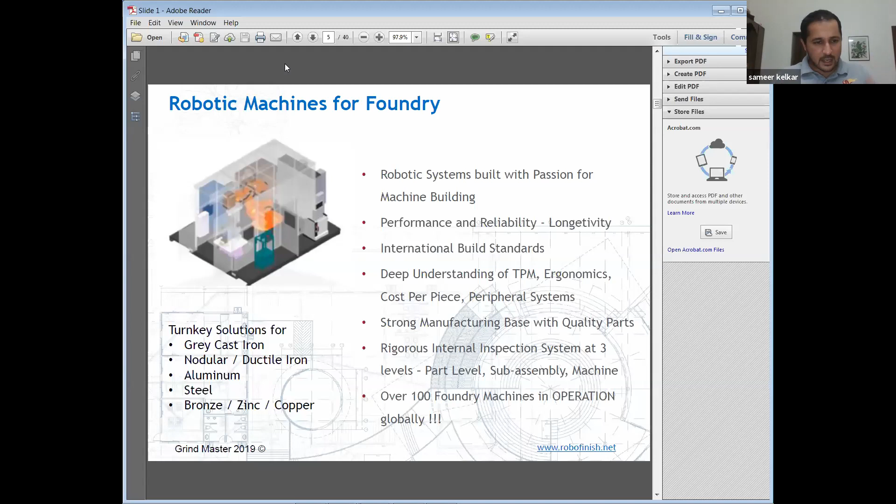The solutions for ferrous castings and non-ferrous castings are substantially different from each other. The non-ferrous casting solutions tend to be lower powered. The material in non-ferrous castings is much simpler to remove, whereas in ferrous castings it is harder to remove. So machines for ferrous castings are more high powered, with heavier duty robots inside them. Just to give a comparison, machines for non-ferrous castings typically have 1, 2, or at most 4 kilowatts of machining power, whereas solutions for ferrous castings begin from 15 kilowatts and go up to 45 kilowatts. So the power we pump into these operations is very different for ferrous and non-ferrous castings.

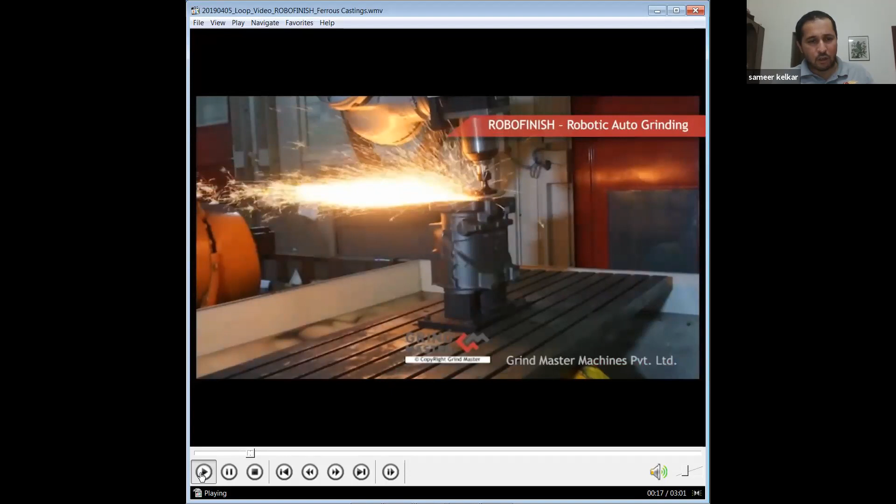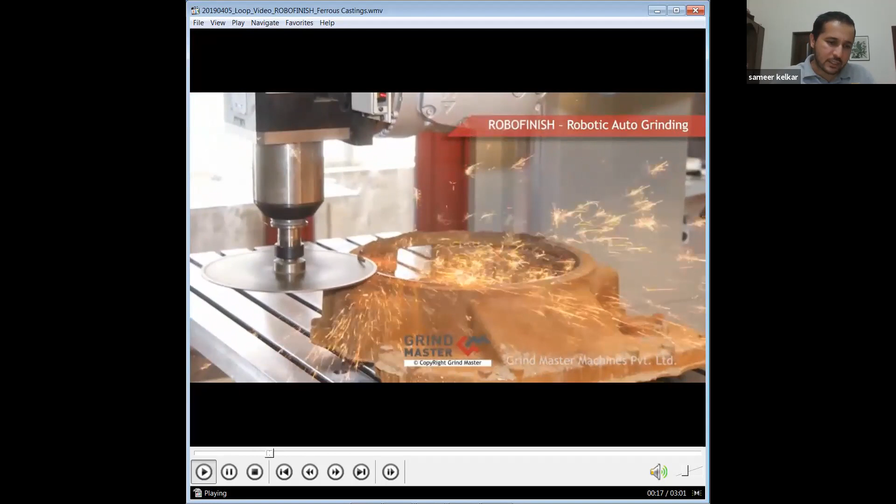I would like to share a video which gives a brief about how typical machines work for ferrous and non-ferrous castings. You would see here a range of ferrous castings being grinded with a robot using heavy duty machining spindles. You can see it doing the grinding of parting lines, bumpers, and sometimes also riser and gate cutting, removing very high flash which sometimes comes on these castings.

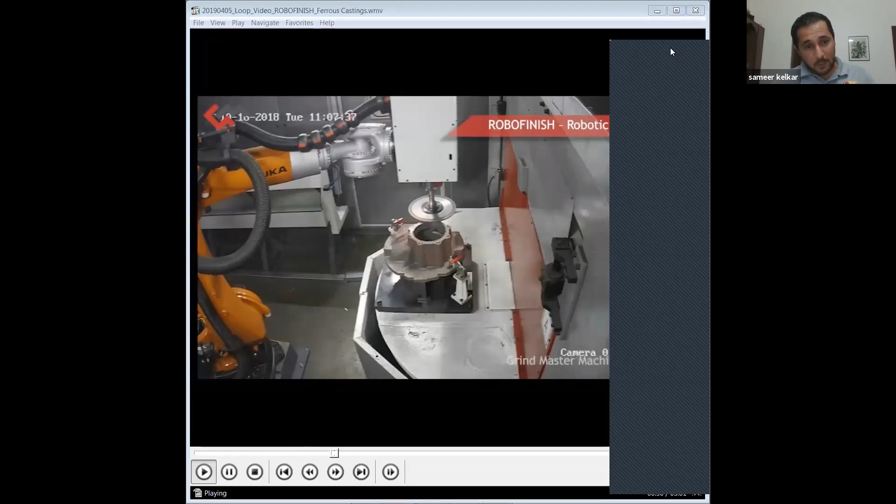Here you can see how we use an offline part programming tool to generate the part program for a new casting. This gives us the benefit of deploying new part programs very quickly. The key feature you can also see in this video is that because we use very high powered tools, the cutting operation is really fast.

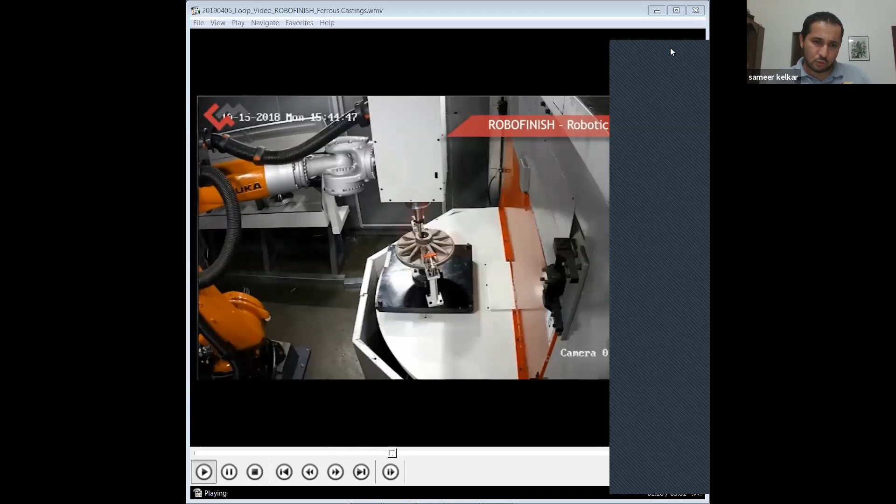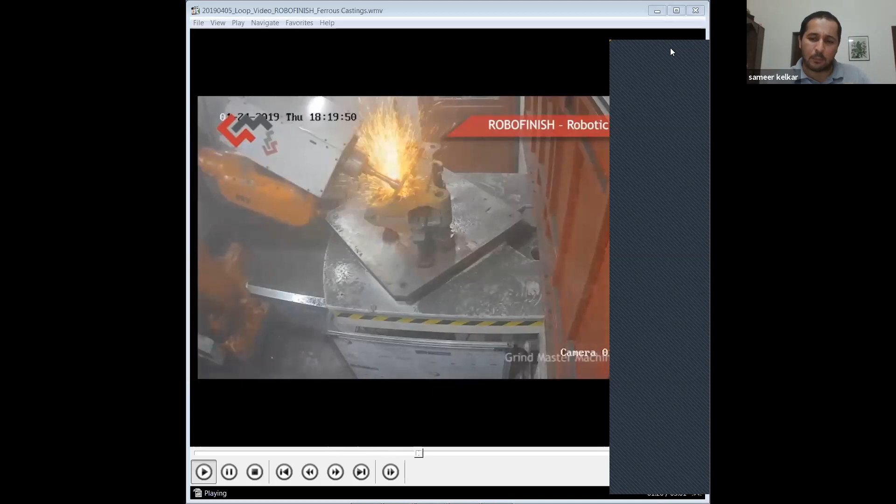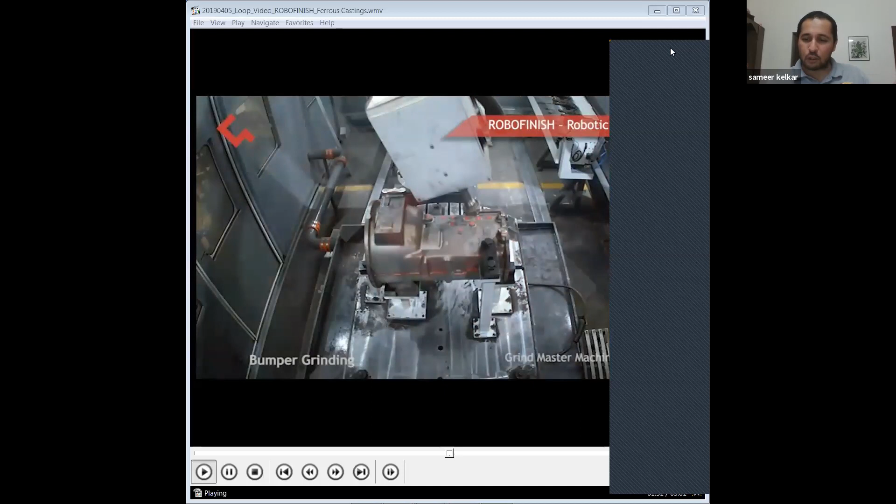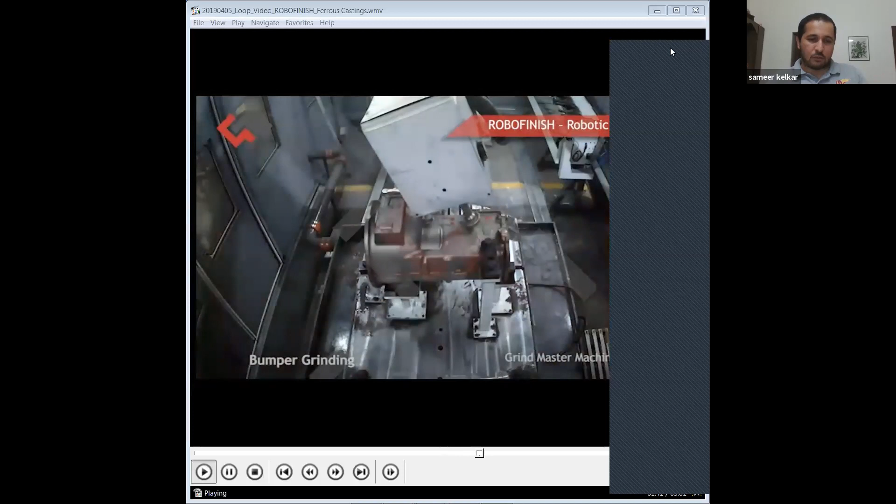Robotic finishing machines for ferrous castings are typically 5 to 10 times faster than a human operator. The main reason is that a human operator holds a 1 or 2 horsepower spindle which he can manually hold. But in this case, the robot can hold 15, 30, or 45 kilowatts. So the machining power the robot brings to this fettling task is multiple times more than what a manual operator can bring, and that is why the robotic machine can be a lot faster and make this operation more economical.

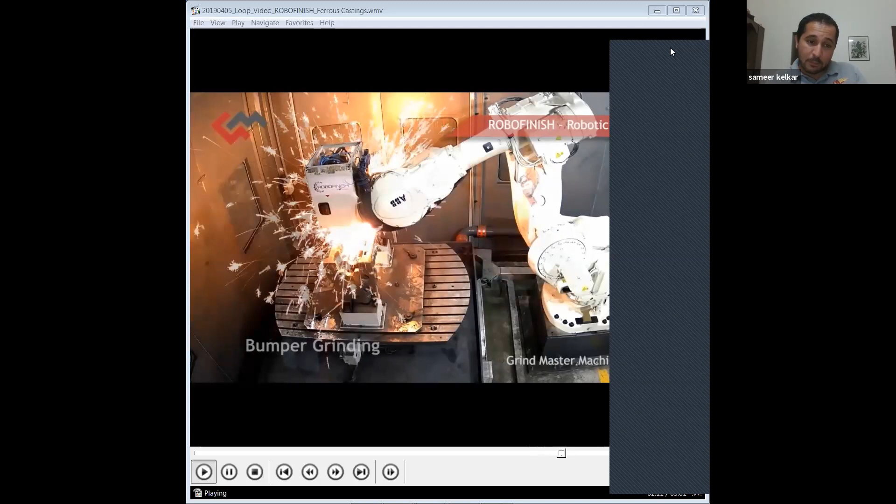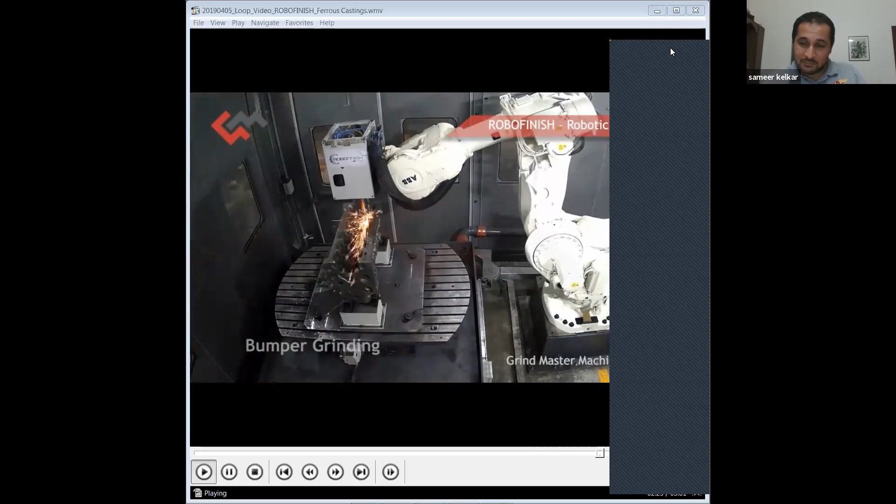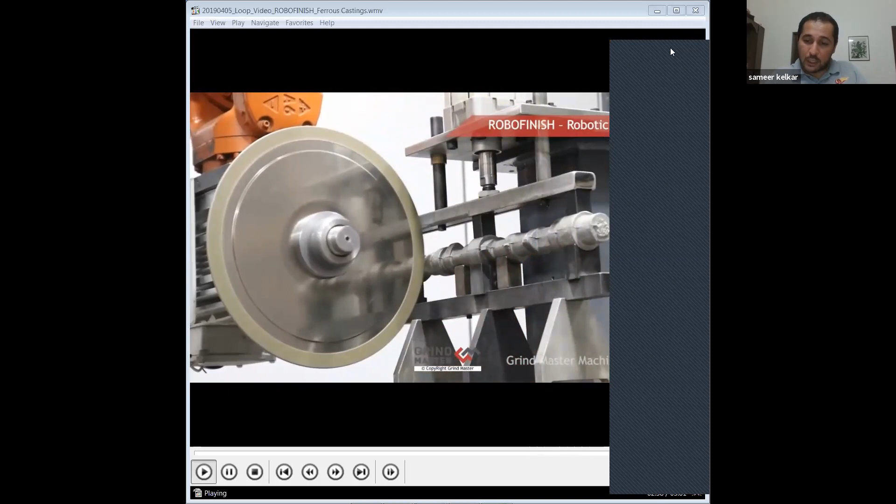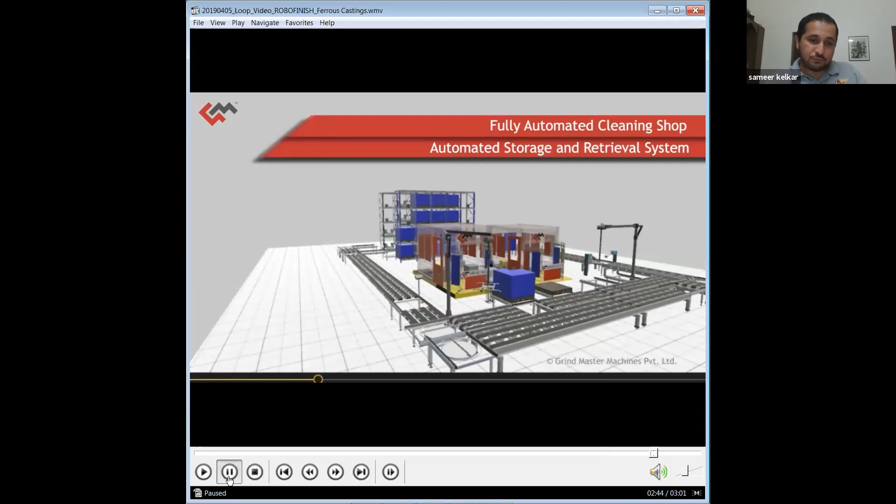Replacing manual operation by giving the same tools to a robot won't serve the function, because using the same tools the robot will be roughly the same speed as manual operation, and the economics won't work. The economics of this function works well because the robot can do the task a lot faster than a man. By using this technology, a fettling shop of a foundry, which is often quite messy due to the number of people, tools, and dust, can be made into a fully automated mechanized cleaning shop with conveyors to move the castings and multiple machines on which the castings are finished.

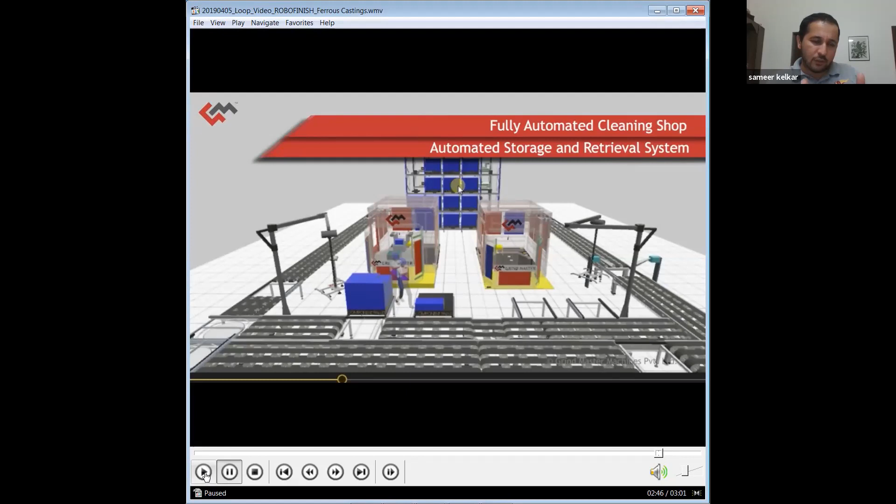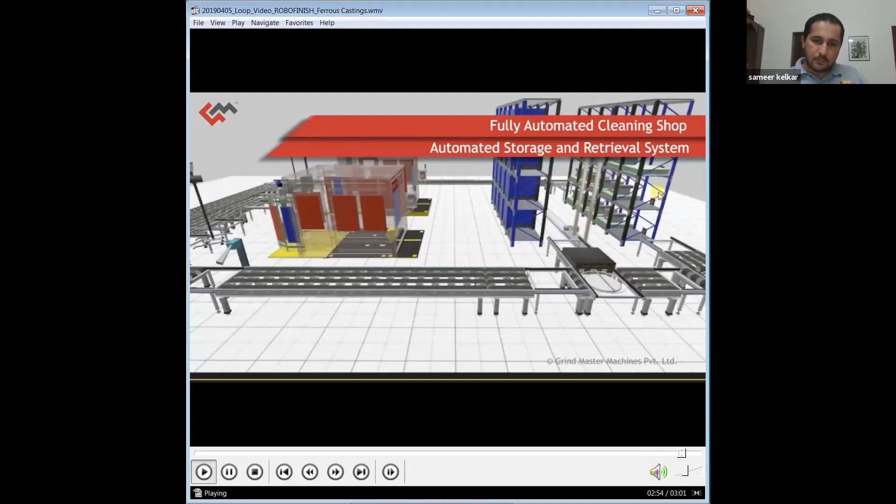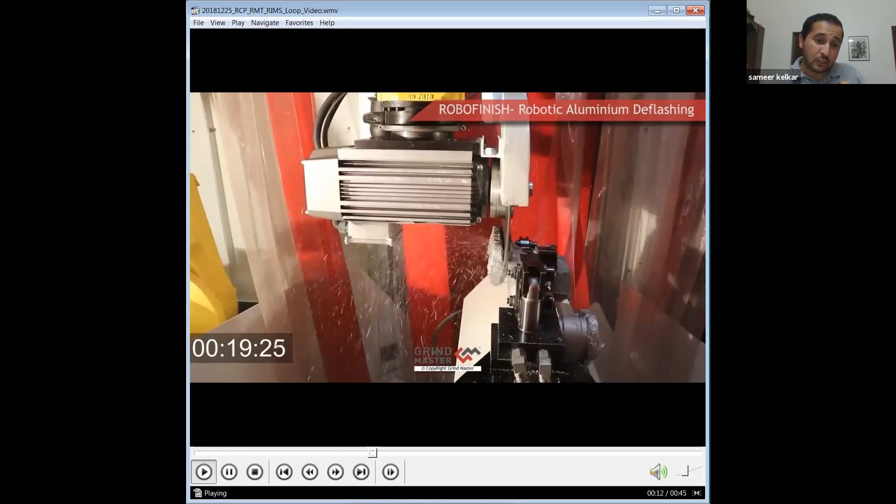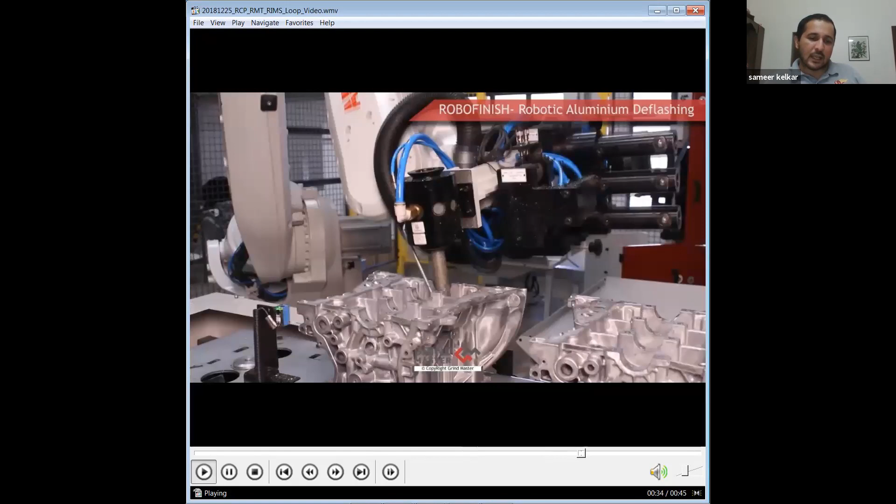Just to give a contrast of the difference between ferrous and non-ferrous castings, I am now going to play a video of non-ferrous castings. This video is played mainly to give you a glimpse that the solutions for non-ferrous castings are very different and comparatively a lot simpler than the solutions for ferrous castings, because non-ferrous castings are typically made in metal dies and molds. So the amount of flash and burr is also very less, and the machinability of the burr is a lot simpler than in ferrous castings, where the burr is really hard and difficult to remove.

With this, I'll go back to my PPT. After a short time, I'll come back to show more videos about how this operation happens. We basically have good experience with both non-ferrous and ferrous castings, and an understanding of what technologies can be used for what type of casting.

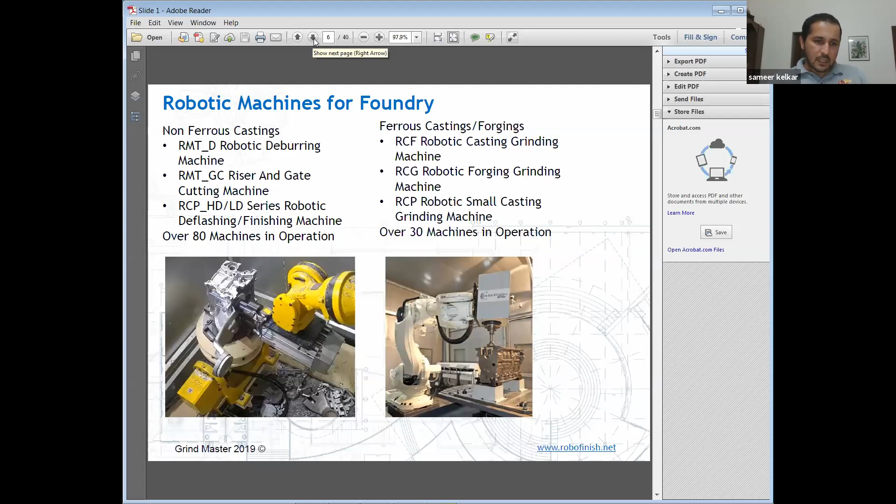Samir sir, can you enlarge your window a little bit? Yes, I have gone now to full screen mode. I hope you can see it in a bigger way now. Yes, thank you sir, thank you.

We will now come to ferrous castings. The rest of this webinar will be mainly based on ferrous castings. What do we mean by the fettling operations? We mean riser and gate cutting, parting line grinding, bumper grinding, and gate leftovers that have to be grinded. We also mean sometimes the deburring of sharp corners and hole break-in.

Talking about the sequence in which castings are placed for the fettling operation: castings are given for fettling mainly once the core sand in the casting has been removed. We need the casting to be without any sand on it, because sand can damage the tools used for fettling. So once the sand is removed, the castings can be loaded into the fettling machine.

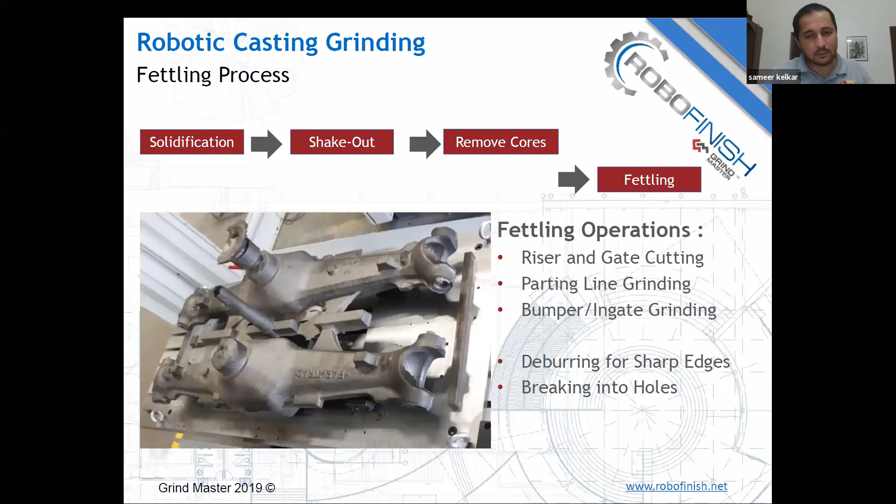Why do robotic ferrous casting finishing or grinding? The main reason is that it can give a productivity jump of between 5 to 10x - 5x for small castings and 10x for heavier castings. We can also finish very complicated shapes of castings with high consistency and accuracy, and achieve better health and safety standards in the fettling shop, with less hazards for machine operators handling the machine.

How do we do this? As we have said, we do this with heavy duty robots with high powered spindles, correct tool selection which includes the grinding wheels, and a key adaptive software, which I will talk about a little bit more in the next slide.

What are the limitations of this technology? This technology is economical for medium or large size castings, but which are made in high volumes. Typically, if one machine can get occupied by 10 to 15 varieties of castings, then it can be really economical to run such a machine.

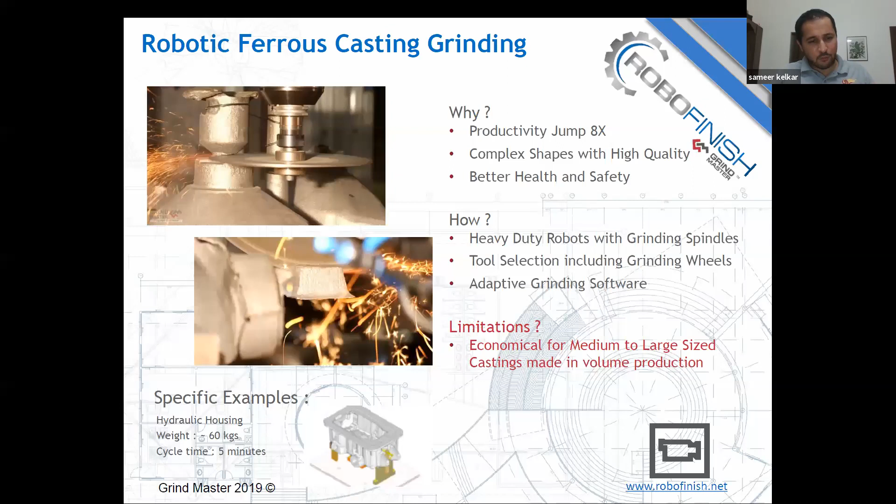Deploying this technology has a technology component and a management component. On the technology side, we have tools and fixtures, we have the softwares, we have merging of the robotics and machining technologies. But on the management side, we have certain aspects which need to be kept in mind by both the foundry and the solution partner.

One of the key parts here is that since this kind of technology is going to bring about a transformation, a change in the manufacturing methodologies of the foundry, it's important to approach this with a long-term vision and a plan for a few years. The beginning can be with a small step, but the plan should be there for a few years.

Within these few years, there also needs to be knowledge building. The foundry would have to build maintenance capabilities, team members who are experts in robotics, and team members who are good in machining technologies.

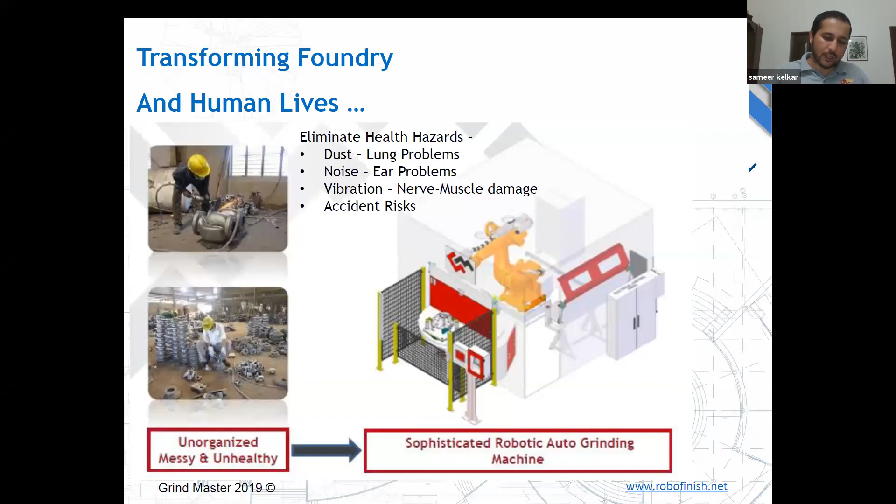This will typically solve quality problems in manual grinding, such as scratch marks and digging marks. These digging marks and scratch marks are becoming more important on the thin walled castings coming out nowadays, because a digging mark or scratch mark can majorly change the strength, especially the fatigue strength of a casting, and putting in a scratch mark or digging mark can lead to premature casting failure when it is in operation.

Similarly, incomplete fettling, uneven finishing, is again a major complaint on castings. These quality problems get even more prominently displayed when you are going for export of castings, because buyers in Europe and USA are used to seeing the looks of a casting in a very minute manner, and can really find out issues like this which are not acceptable to them.

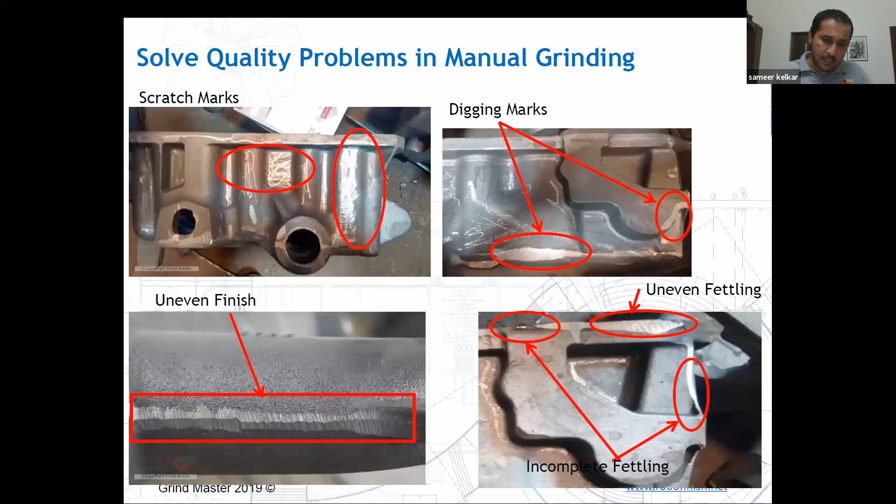Now I'll briefly talk about the different methodologies that we use for finishing of the castings. We begin with the riser and gate cutting operation.

70 or 80% of the time the gate and risers are cut in a tumbling process or with heat plasma, but in around 15 or 20% of the machines that we have built, we have done the riser and gate cutting as well.

Following the riser and gate cutting, we go for the next heaviest operation, which is bumper grinding or gate leftover grinding. Typically when gates and risers are cut, 4 to 5 millimeters of stock is left.

So removing this 4 to 5 millimeters of bumper or gate leftover is what we do with the robot. Following this, we do parting line grinding, which removes the parting line that comes on the periphery of the casting, and finally the face grinding. Face grinding is typically done for some faces where the flash comes out on the face.

Then certain castings require a hole break-in operation, in which there is a thin flash that comes in a hole in the casting, and we use a machining tool to do this hole break-in operation.

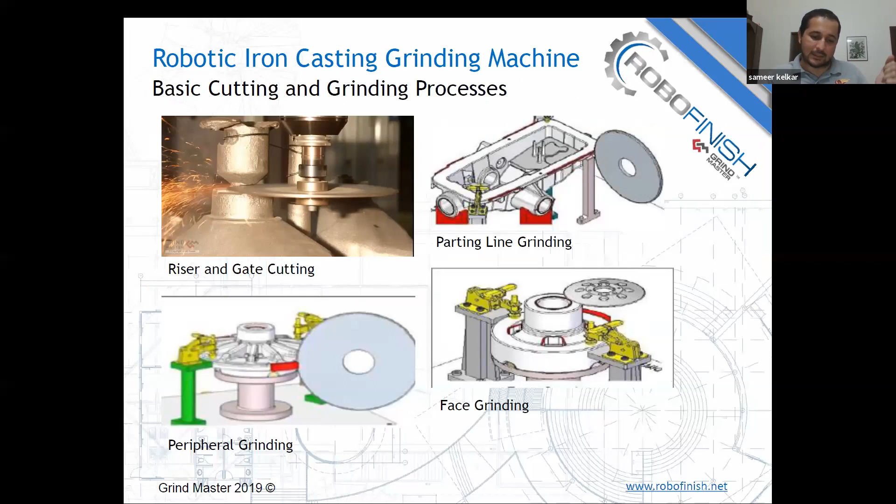Now, what I spoke up till now was more about machining and what tools to use. Let me talk of the biggest challenges in finishing of the castings. The key challenge, and this is a differentiator between a machine tool and a robotic finishing machine, is how to handle the casting to casting variations.

Ferrous castings which are made in a sand mold have fairly large variations. If you take a small casting, say 400 millimeters or 500 millimeters in size, it will typically have a size tolerance of around 1 to 2 millimeters.

Similarly, when you take a casting which is 1 meter or 1.2 meters in size, the tolerance on the size of the casting can be 6 to 8 millimeters. When you go for a bigger casting, say 2 meters to 2.5 meters, this variation can be 10 to 12 millimeters. So dealing with this casting tolerance is a key challenge.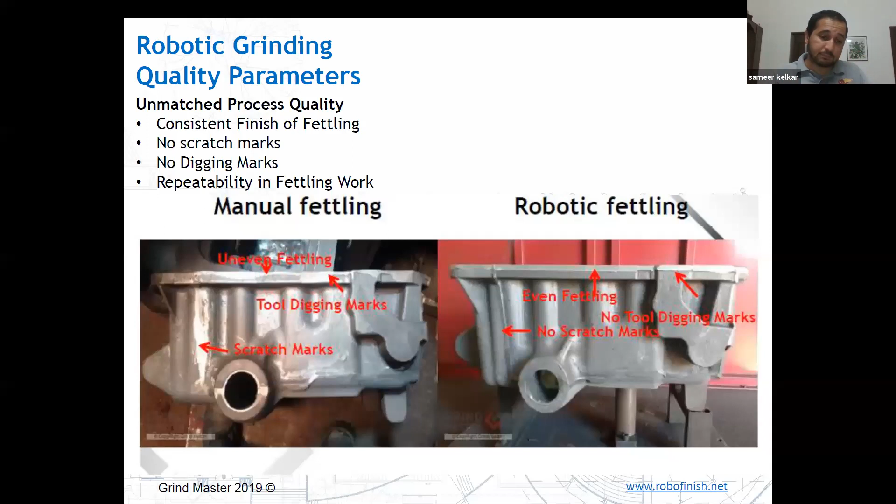So generating these parting lines as per the CAD model of the casting. Typically, the tolerances that we use for the grinding parameters here are 1 mm for small or medium size castings and 1.5 mm for the large castings.

This is a tolerance which we have learned by working with the global foundry industry, including some leading foundries in the US, where the casting tolerances are specified on the drawing in these terms. So we follow those global methodologies to check if the casting has been duly fettled or grinded or not.

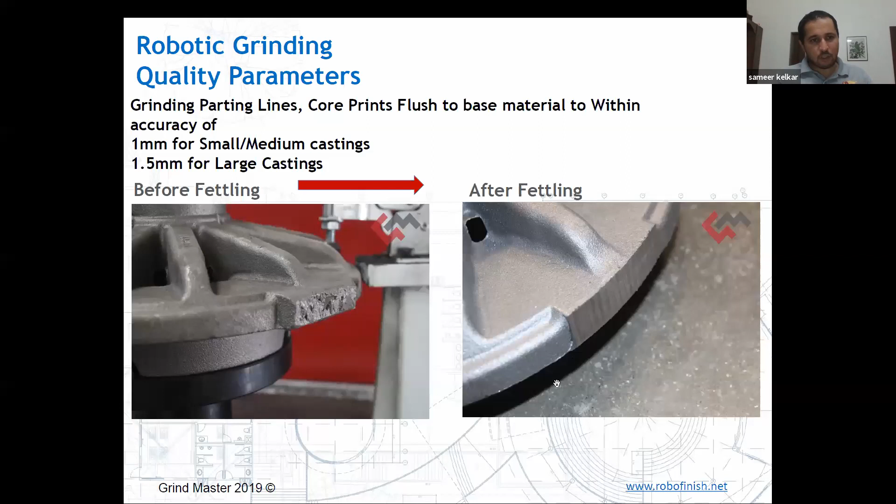You can see in this photo that after the fettling operation, the bumper has been grinded to within 1 millimeter of the base material. That's the kind of tolerance that we hold on the finishing operation on these castings.

Now let me talk a little bit about how these technologies are combined in machines. Our machine range is very wide because the castings we deal with are very varied and different. For small size castings, from 1 kg to 100 kg, we have machine models in which the robot holds the casting and the machining spindles are in a toolbox. For large castings, from 30 kilos up to 4 to 5 tons, we have the robot holding the machining spindle and the casting kept on a fixture. We will first see this model in which the robot holds the spindle and the casting is kept on a fixture.

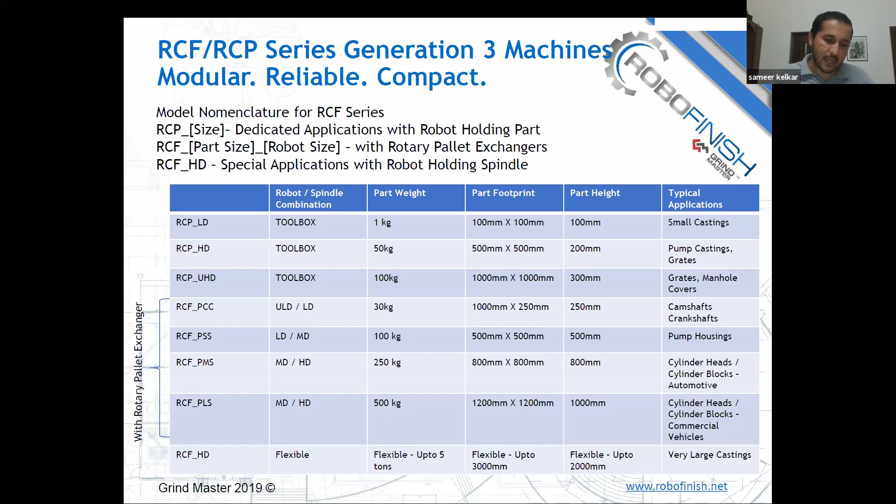Typically, these machines come with a pallet exchanger system in which an operator can place the part on a pallet. The pallet goes within the machine where the robot holding the spindle completes the grinding operation. Meanwhile, the operator can do the load/unload on the pallet that has come outside the machine. Each pallet exchanger has 2 fixtures - one within the machine and one outside the machine, always.

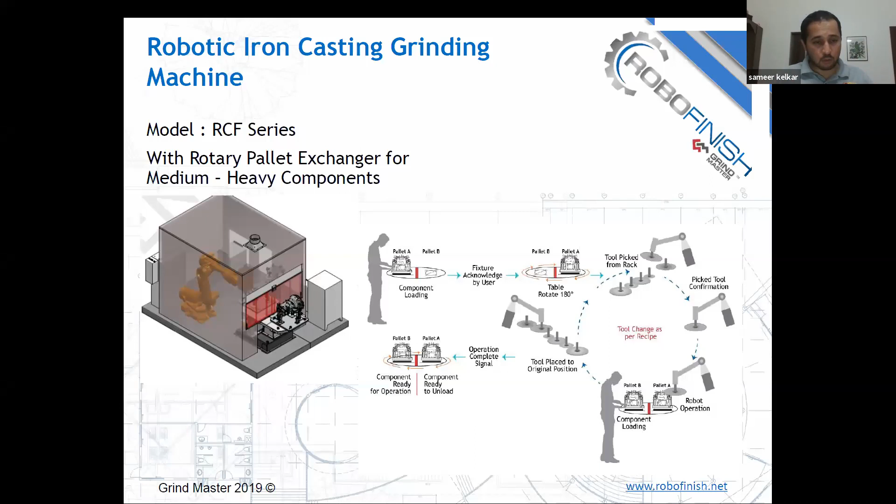Within the machine, the robot has a reliable heavy duty spindle system with a tool changer to automatically change the grinding wheels, and is fully closed with a double-walled enclosure for dust protection and noise protection. The castings are kept on a machining table with a 7th axis to orient the casting in front of the robot. We'll quickly see a video of this type of machine to get a better understanding. So just give me a second, I'll play this video.

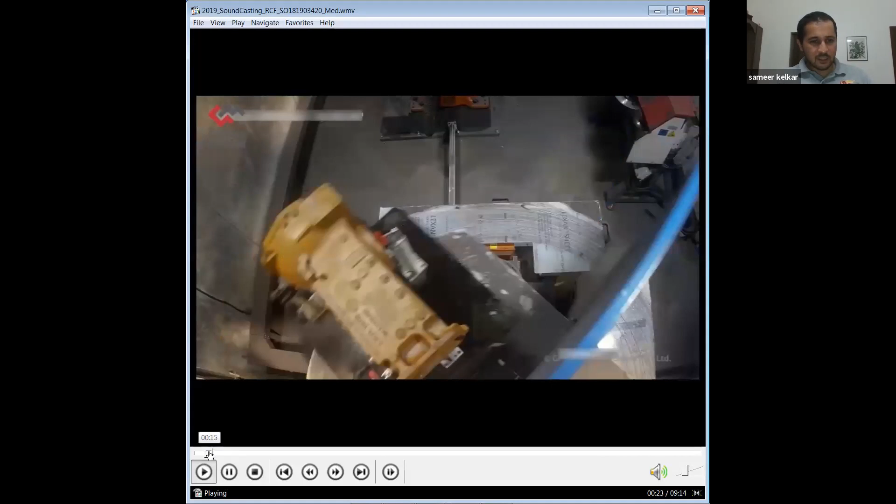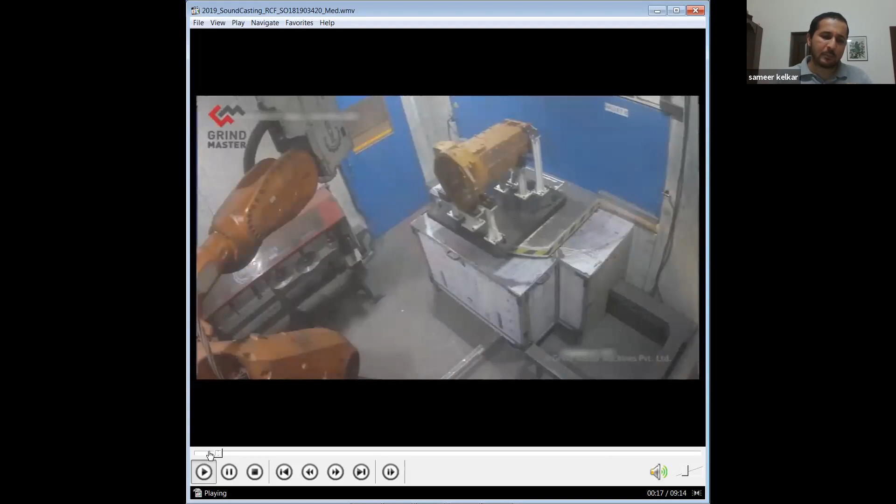Here you see a video of a machine doing a mid-size casting. The raw casting has been brought into the machine. The machining table orients the casting in front of the robot. The robot begins by sensing the casting from multiple directions. Once the sensing cycle is complete, it takes up a grinding wheel and begins the finishing or grinding process. Multiple wheels are used - in this case 2 to 4 wheels to complete the grinding operation on this size of casting. This casting is typically 150 to 180 kilos, and we take around 6 to 7 minutes to grind it completely.

You can see the robot completes operations with one grinding wheel, then picks up the next grinding wheel and does operations with that wheel. The stock removal here is quite heavy. This casting was manually fettled in around 40 to 45 minutes, compared to the 6 minutes the robot now takes. So the productivity of the robot, as I've said earlier, is between 5 to 10 times that of a manual operator.

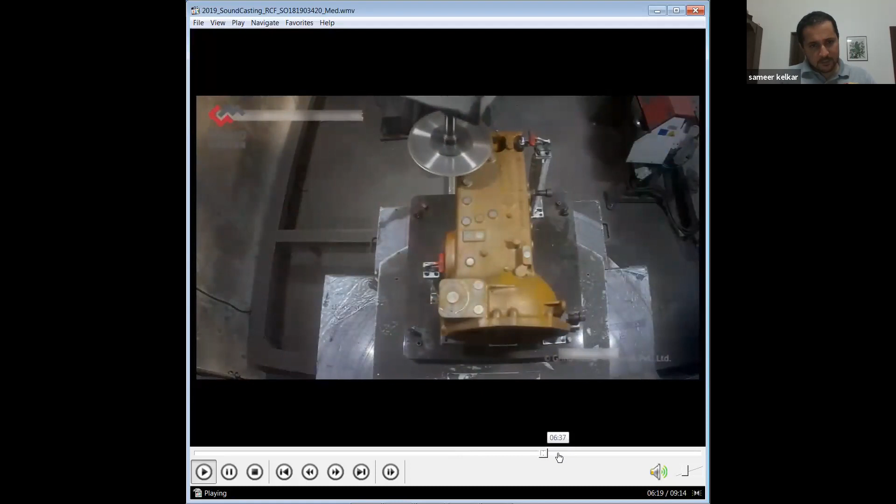Here the robot has picked up a cutting tool, a sawing tool, and is doing vent grinding for the vents on top of the casting. Finally, it picks up a small grinding wheel to reach sharper corners and areas where the bigger wheels couldn't reach, completing the 100% job. So the sharper corners, areas, pockets - sometimes there's a grinding operation within a pocket - are done by a smaller sized wheel.

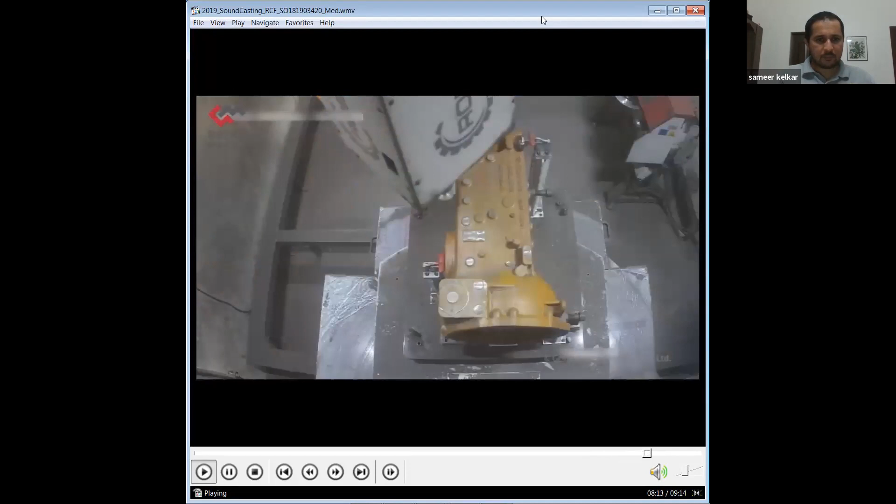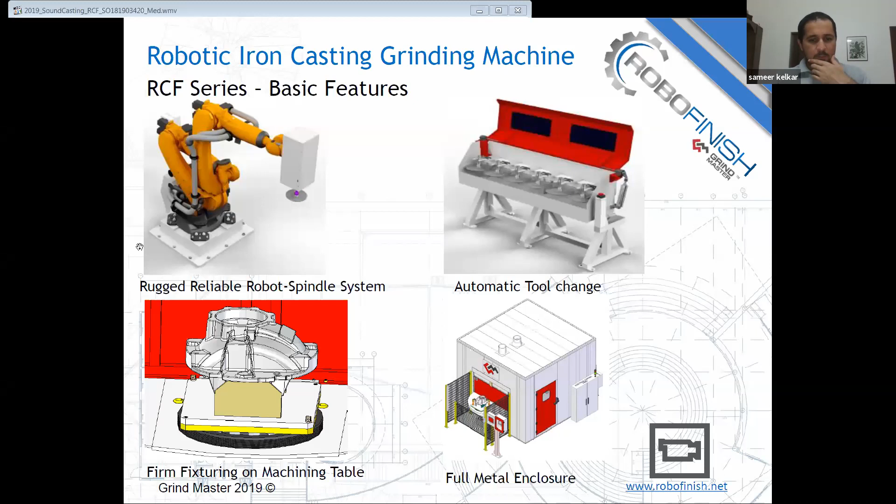So with this, I will go back to my slideshow. That would have given a brief understanding of the finishing operations. Now you could see in that video that multiple tools or wheels were used.

One key feature of our machine is the tool management system, which helps keep track of different wheels being used in the machine. This is very important because each grinding wheel has a certain life, and it's used for different volumes of stock removal in different castings. For example, a 300 millimeter diameter wheel typically has a life of around 8 to 10 kilometers. When grinding a 4-cylinder camshaft with a parting line of around 1 meter, this 10 kilometers of life translates to around 10,000 castings. Whereas a 6-cylinder camshaft has 1.5 to 2 meters of parting line grinding, so the same wheel gives a life of around 5,000 to 6,000 castings.

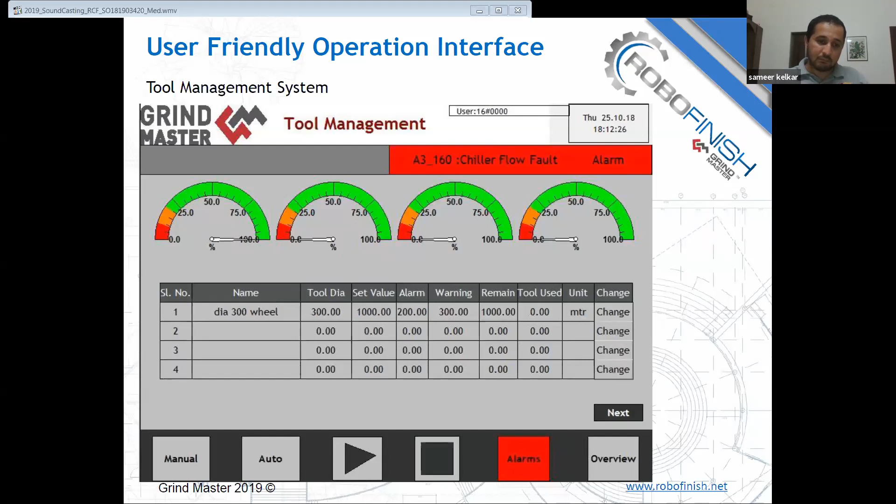We will now take some case studies, beginning with small castings that are done in this model.

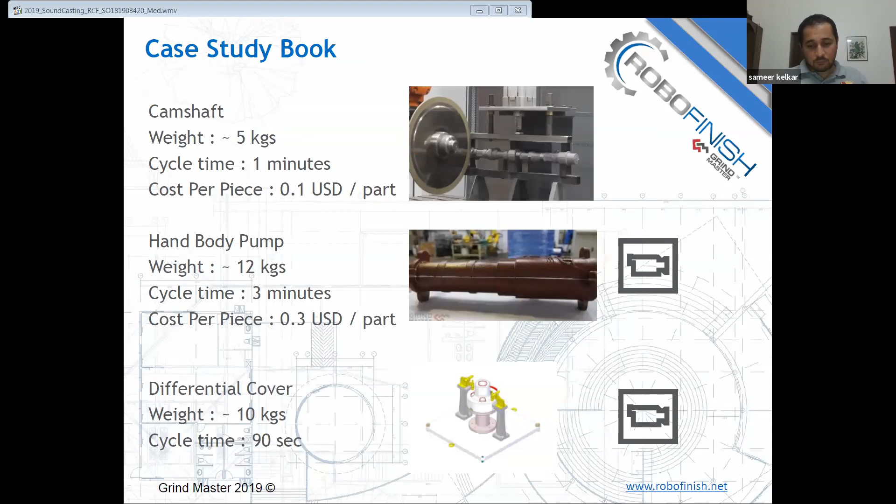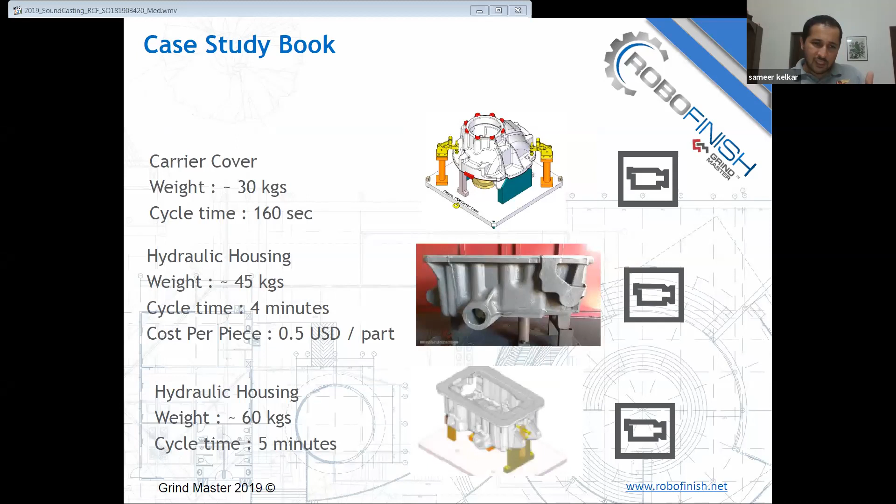Typically a small casting, say 5 kilos or 10 kilos, cycle times are in the range of 1 to 2 minutes. When we go to heavier castings like 30 or 45 kilos, cycle times are between 3 to 5 minutes. This can include carrier covers, hydraulic housings, and so on. For heavier castings like cylinder blocks or cylinder heads, 150 to 200 kilos, we typically get cycle times between 4 to 6 minutes. For castings heavier than this, weighing up to 2 to 3 tons, cycle times can be around 15 to 20 minutes. So the larger the casting, the more heavier the fettling operation, the more the cycle time.

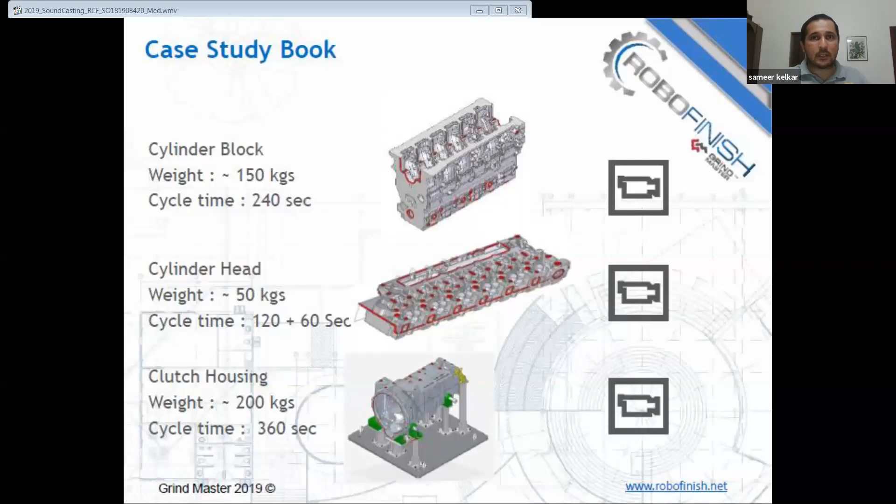Now we saw the machine where the robot was holding the spindle and doing the finishing of castings. The second concept is one in which the robot holds the castings, and we have a toolbox with multiple tools on which the castings are ground. This methodology is very good for small castings. We will quickly see a video of a machine with this kind of operation.

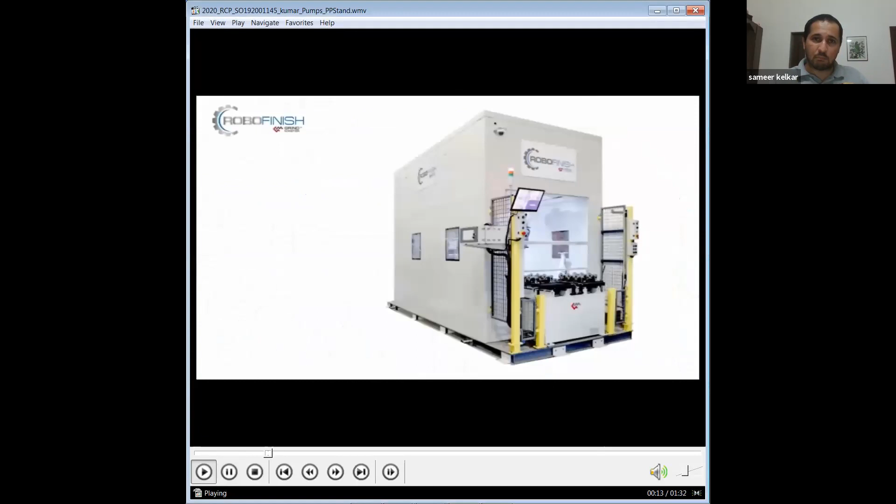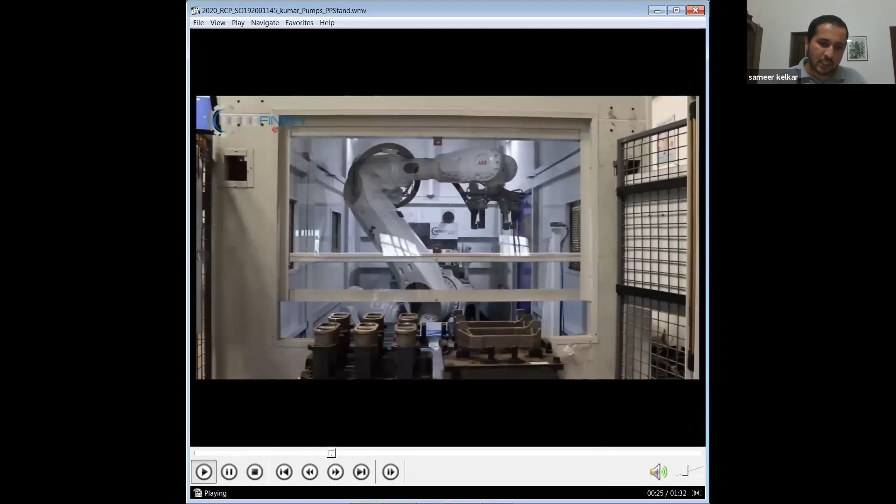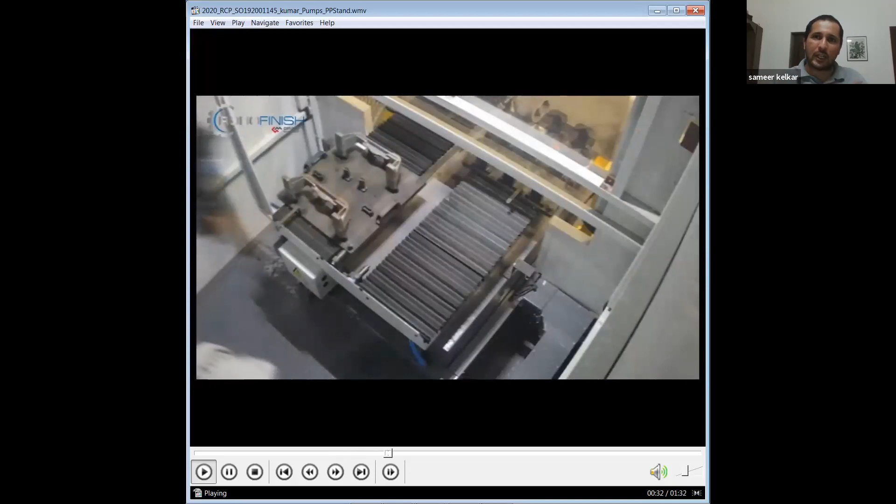So this is a video of a machine where the robot holds the casting and the machining spindles are in a toolbox. We introduced this model a year ago mainly to cater to manufacturers of small castings, because the machine where the robot holds the spindle is not really suitable for small size castings - it's more suitable for castings in the 50 kg to 500 kg range. So this model was introduced for smaller castings weighing 5, 10, or 15 kilos.

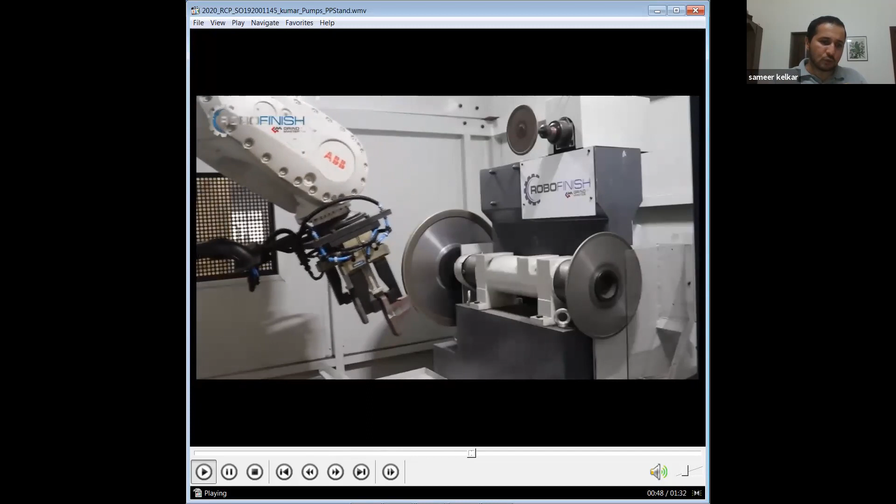You would see here that the robot holds a casting called the PP stand, and completes the grinding and finishing operation using a combination of these 3 grinding wheels. Typically the cycle time on this kind of casting, which weighs 1.5 to 2 kilos, is around 1 minute. The multiple wheels help in doing the various operations with the right tools.

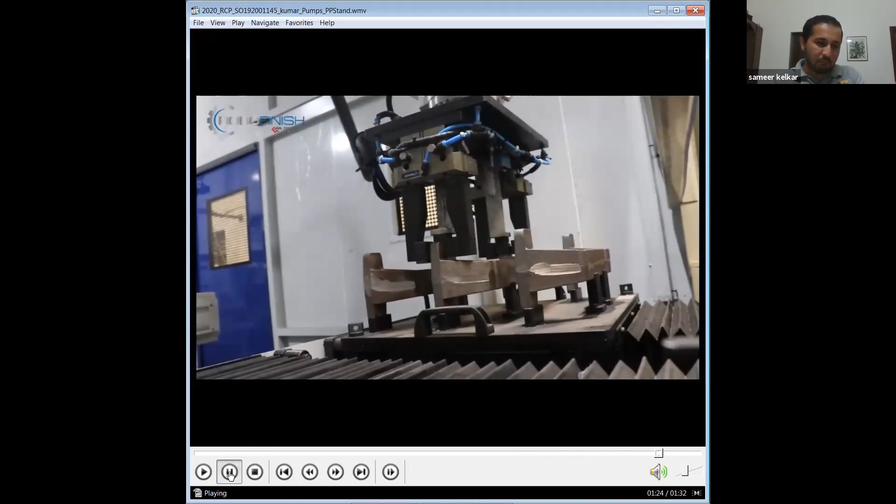In this machine, multiple castings are loaded on a pallet exchanger system. As you can see, 3 castings are loaded on the right side and 3 on the left side. So the machine picks up these 3 castings, does its grinding, and keeps them back. For the duration of a pallet life, the operator does not have to be close to the machine. So the operator in this case can typically manage 2 or 3 machines doing the fettling operation. One pallet comes in and the second pallet goes out to start this operation on a different type of casting.

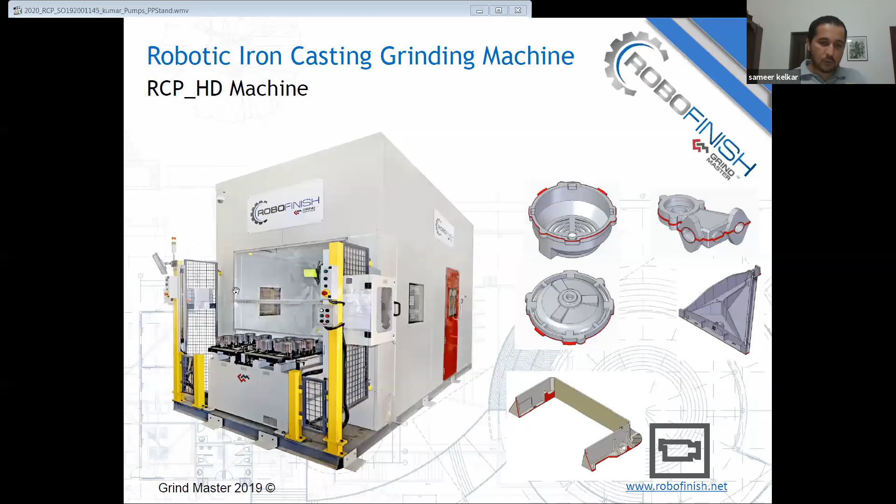I'll go back to my slideshow now, in which we show a variety of castings in the range of 1 to 2 kilos, where we take about a minute to finish the casting. For larger castings like manhole covers or sewage covers, we take 2 to 4 minutes, and these castings can be large, 30 to 100 kilos.

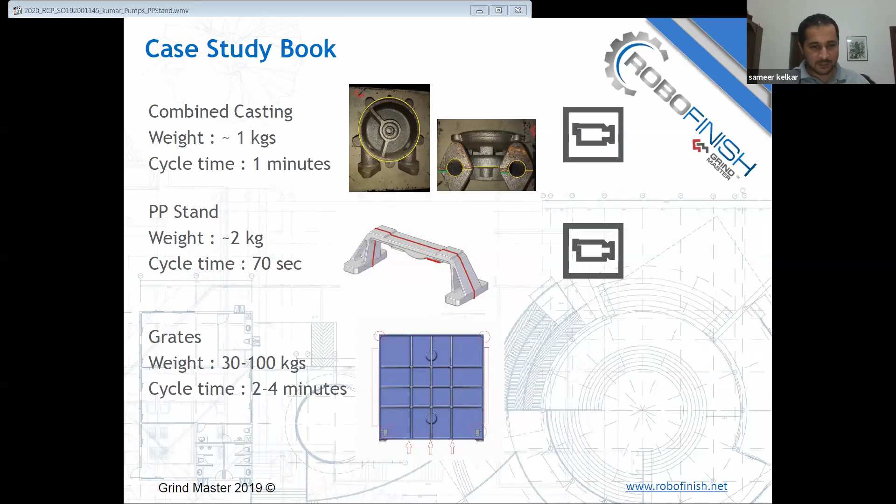Developing this application for a wide range of castings, we begin with an initial cycle time estimate and how to grind the casting. We then go into the tooling design and fixture design. We then do application engineering with offline part programming and simulation. This step is very important because it makes sure we are fully well prepared when deploying this part program on a real machine setup.

One of the key parts here is to determine the right kind of tools, and the stock removal rate and cycle time are dependent on how heavy the flash is. Though we work with the CAD models of the casting, the heaviness of the flash is not demonstrated on the CAD models, so we typically like to see real castings to determine its flash level.

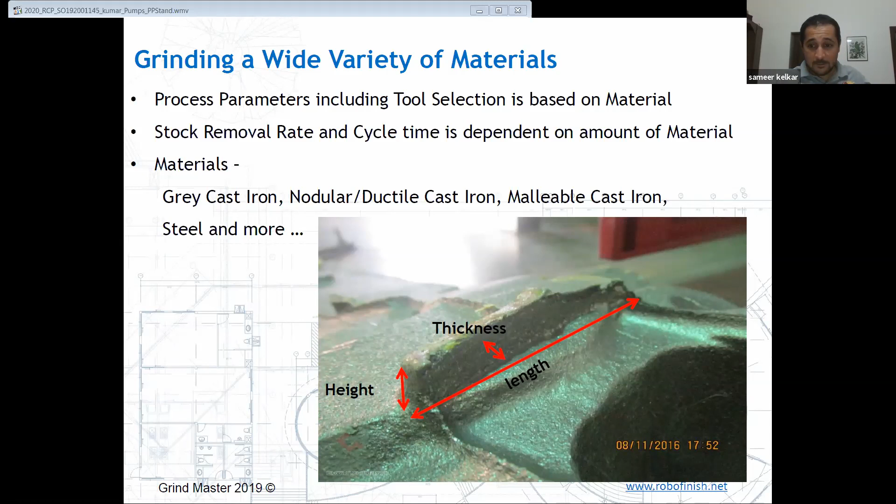Typically, the return on investment calculation considers the major cost elements, which includes the machine cost, around 60% of the per piece cost. Then the cost of consumables, like the grinding wheels used, which is around 15%.

The power cost is 10%, but it varies a lot from region to region. Maharashtra is quite an expensive power state, whereas a few states in the north have very low cost power. Manpower cost also varies from region to region.

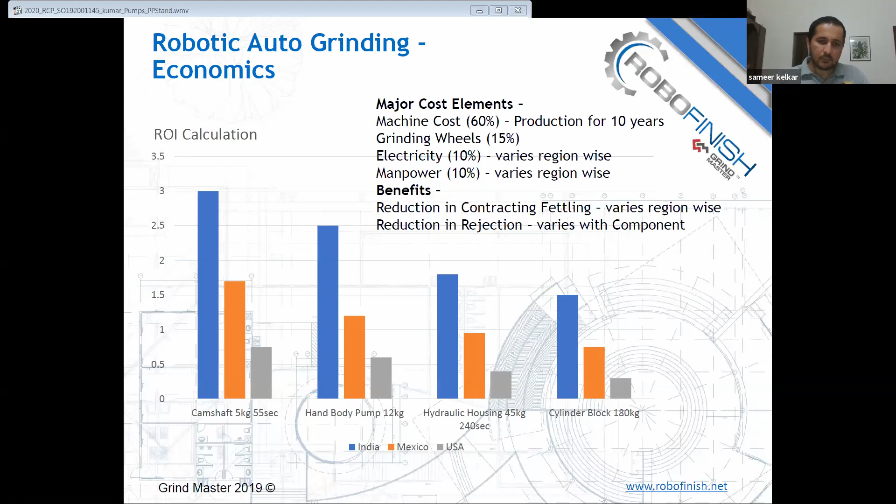I would like to summarize my presentation by saying that the key benefits of robotic finishing are the elimination of health hazards, consistent high quality finishing and grinding, replacing manpower, and complying with a global manufacturing standard.

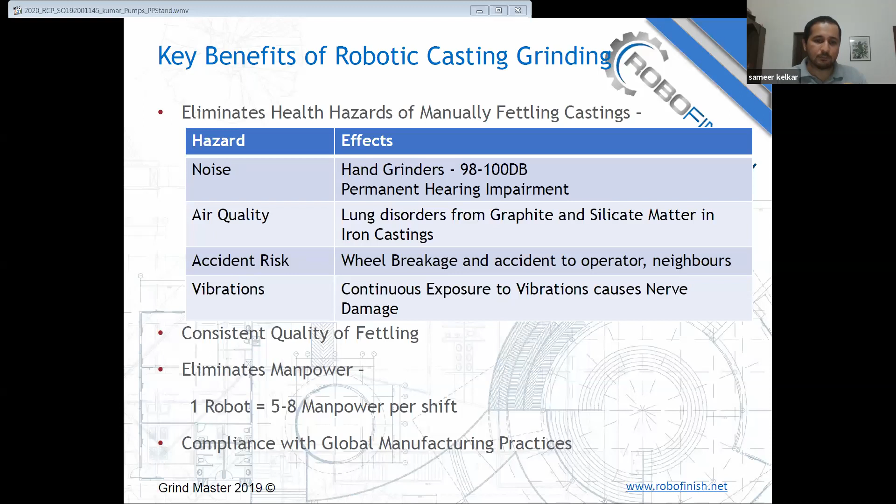To deploy a solution like this in a foundry in a good way, we typically recommend that for the first machine, we support with 15 to 30 days of mass production support, where our engineer and expert would come to the foundry to run the mass production with your team for around 15 to 30 days. This makes sure that the maintenance team and machine operation team are well trained and handled well to successfully deploy and use the machine in the future.

Sometimes in some foundries, we have also done 2 to 4 months of support like this to make sure the machine is really well running. When a foundry introduces a technology like this, it is most important for the management of the foundry and for us that the first machine really becomes a good success, and we are committed to partnering to make that happen.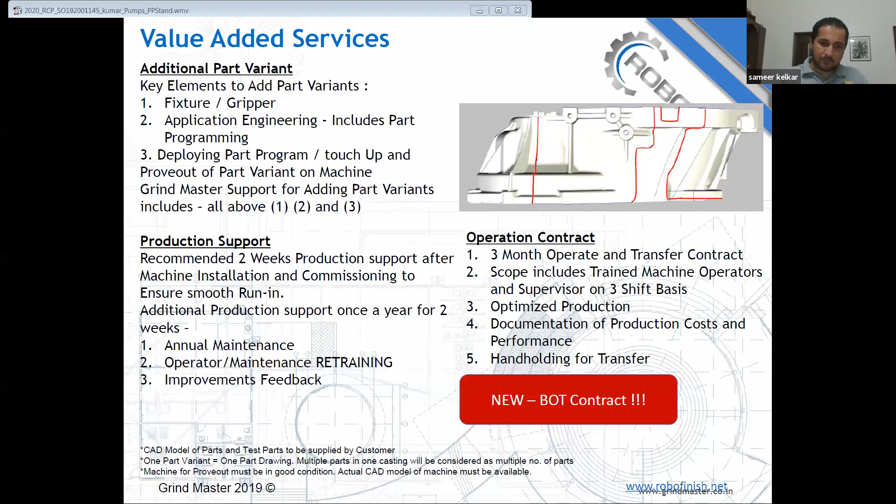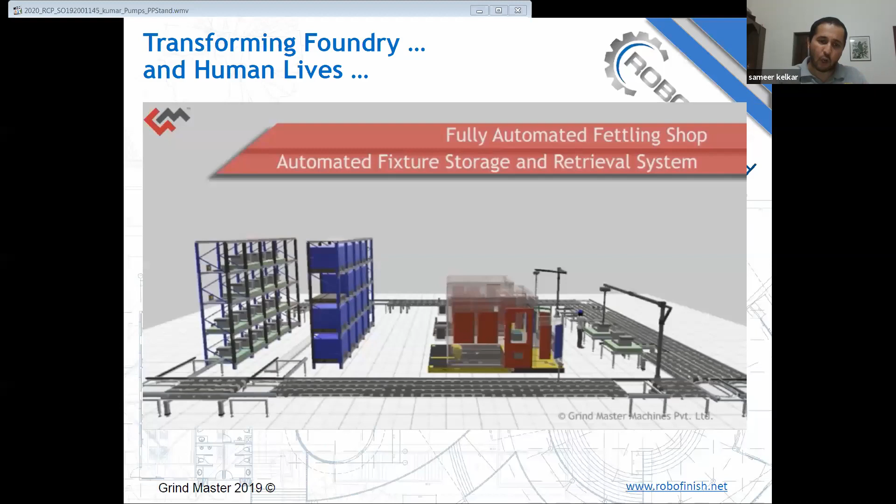The technology that I have discussed here is completely homegrown, and I'm very happy to announce that our RoboFinish machines will soon be made in the US in a technological collaboration with a major foundry maker in the US. This is one of the first times that a technology is being transferred from India to the US. So it is Indian technology which will be built in the US. I'm very happy that this collaboration has come through, and we will be starting work on this in a few days.

We have deployed this technology in a wide variety of foundries, both ferrous and non-ferrous, and have got good results in most of them.

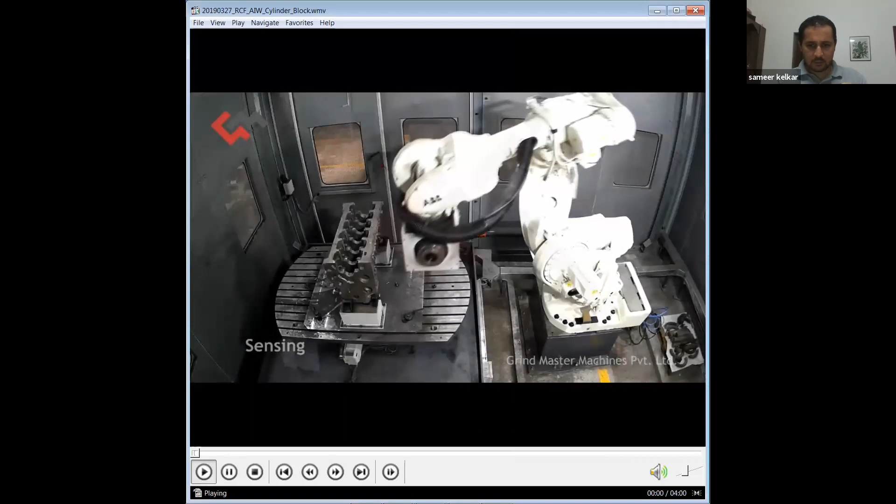Yes. Hello, Paresh, good evening. Namaskar, namaskar, good evening.

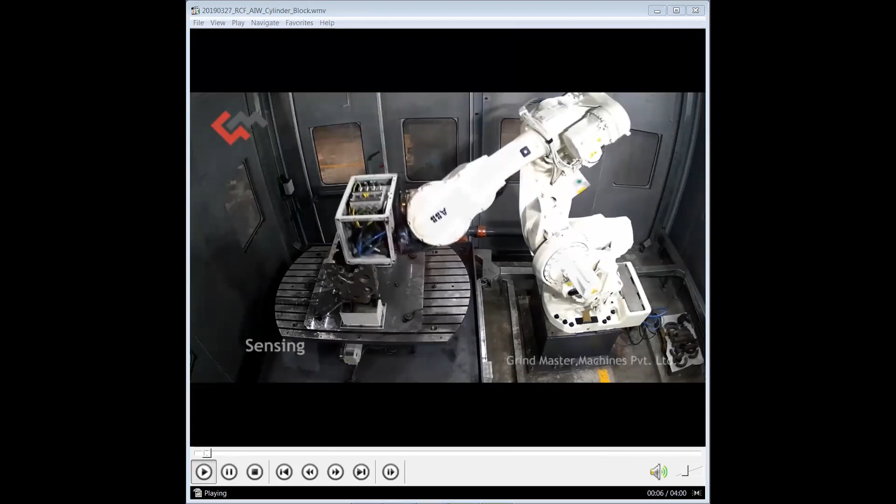Basically, what about for steel casting? Like we have done machines also for the steel casting.

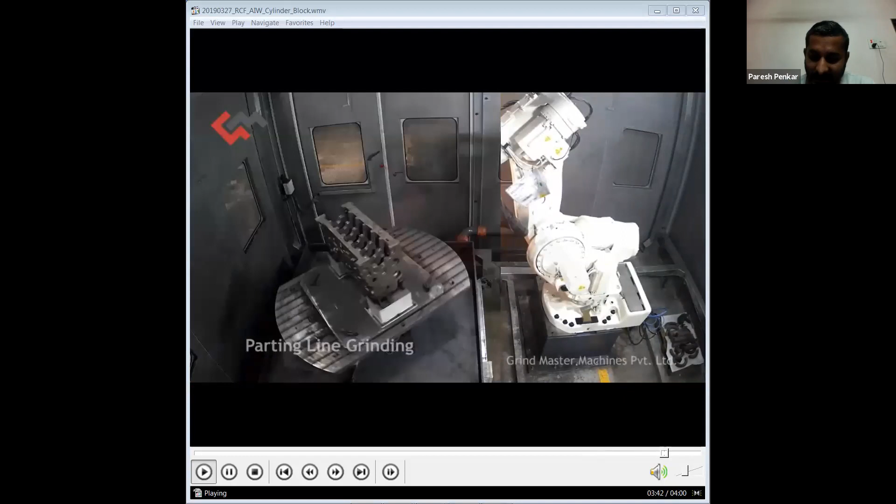I will forward the details to you, because this discussion could take at least 1.5 hours, it's that big a discussion. I will forward his number. You can directly contact them and get your problem solved.

Yes sir, definitely, because I was very much interested in this type of machine.

Sameer, in line with the same question, I would like to ask you. As you said, for the first 5 or 10 parts in your foundry, what should be the percentage of total? Suppose we are doing 500 tons of good casting, how much percentage should be there for the first 5 or 10 parts so that it becomes commercially viable?

Like I was suggesting, those 5 to 10 parts should be able to occupy the machine for around 70 to 80% of the time. Okay, so if conditions are like that, then it is very much viable.

Okay, so you are talking about machine hours time. At least 80% of the machine should be utilized by those 5 or 10 top varieties, though sometimes there are 100 varieties too.

Hello. Yes, to answer your first question, I am playing a full video of a cylinder block. So in a cylinder block, we can do 100% operation also, or we can do partial operation also. Typically, to do 100% operation, the robot is going to take a certain amount of cycle time. Now this can include operation inside the bores and inside the hole areas also. So hole break-in, hole cut, side grinding, pocket grinding, this entire thing can be done by the robot.

कई बार जहाँ पे छोटी छोटी फ्लैश है, तो वो छोटी फ्लैश को मैनुअल ऑपरेशन से निकालना ज्यादा कॉम्प्लेक्स नहीं रहता है। तो कई बार हमारे कस्टमर्स इस मशीन का बेस्ट यूज करने के लिए, जो फाइनर ऑपरेशन है जहां बहुत हल्की फ्लैश है, वो मैनुअल ऑपरेशन से निकालते हैं। और हेवियर फ्लैश रिमूवल का काम मशीन के लिए छोड़ते हैं।

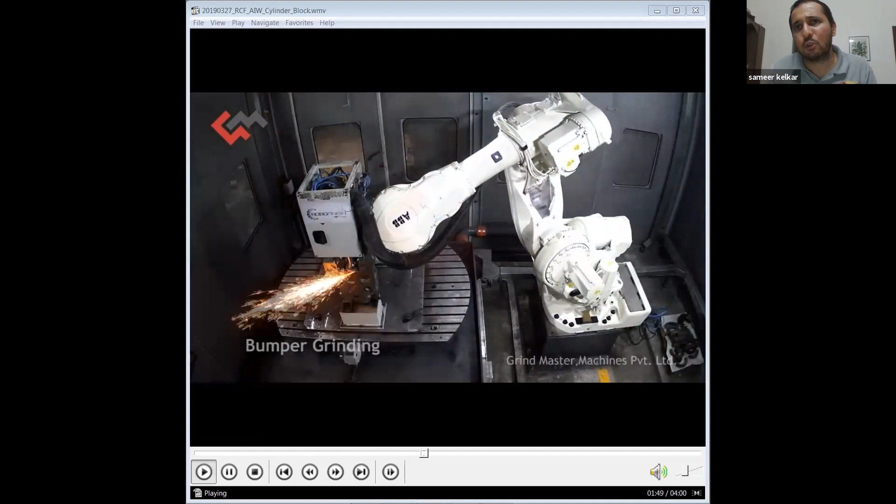जैसे हमने ये मशीन देखा था, पैलेट एक्सचेंजर होता है और एक ऑपरेटर बाहर लोड अनलोड करता है और रोबोट भीतर फिनिशिंग कर रहा होता है। तो जहां लोड अनलोड हो रहा है, वहां operator can also do some fine deburring operations. So how to deploy this in a foundry is specific from foundry to foundry. The machine is capable of doing 100%.